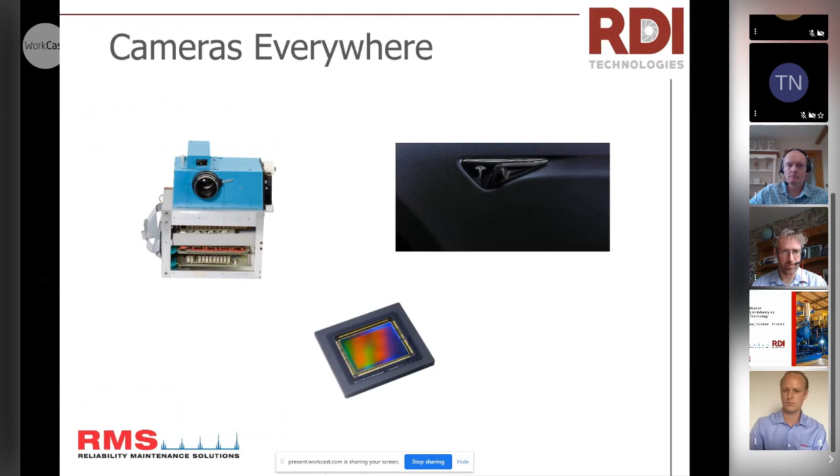You can see an image of a Tesla there with the camera, and cameras now actually help us drive cars. That application base is really growing.

We're using them again to drive cars. They're used in AI to distinguish objects, to tell the difference between a human and an animal. They even show me who's at my door.

A Ring doorbell, for example, alerts my cell phone to let me know that there's someone at the door, and controls traffic. They know when you run a red light, and then they send you bills. Cameras now automate billing processes. Every time I drive across the local bridge, I get a toll in the mail automatically from a camera seeing me drive across the bridge.

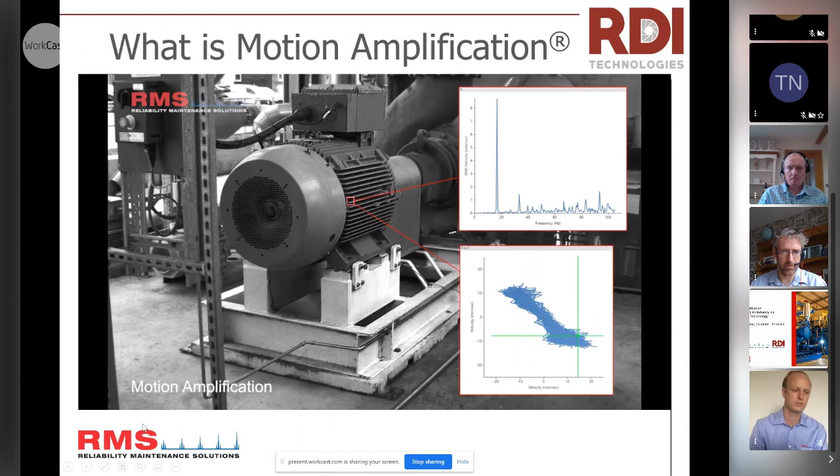What we're seeing here is motion amplification video, and I'm going to start this over so you can see at the beginning here. With your eye, you don't really see any movement, but motion amplification essentially turns every single pixel in the camera into a sensor. Now you've got millions of displacement sensors.

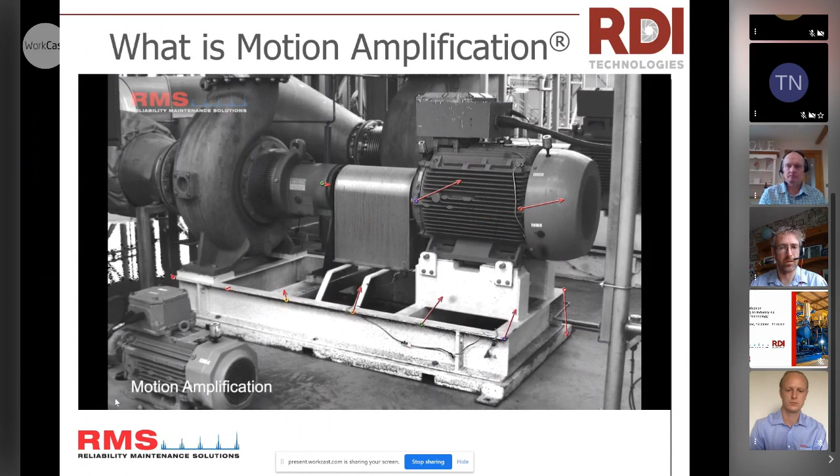Even a modest camera has 1 million pixels in it, even a small resolution camera. You can start to do some interesting things like plot charts and graphs and pull data out, and I'll do a short demo showing that.

Here you can't see any motion. Now you can turn on the amplification process, and you can actually see the motion in it. This allows the camera to be a machinery monitoring and vibration tool where we can actually visualize motion, and then do a lot more.

Track the motion, measure the orbits, show the plots, the paths, measure these things, do spectral analysis, and we'll show some of that in the case studies.

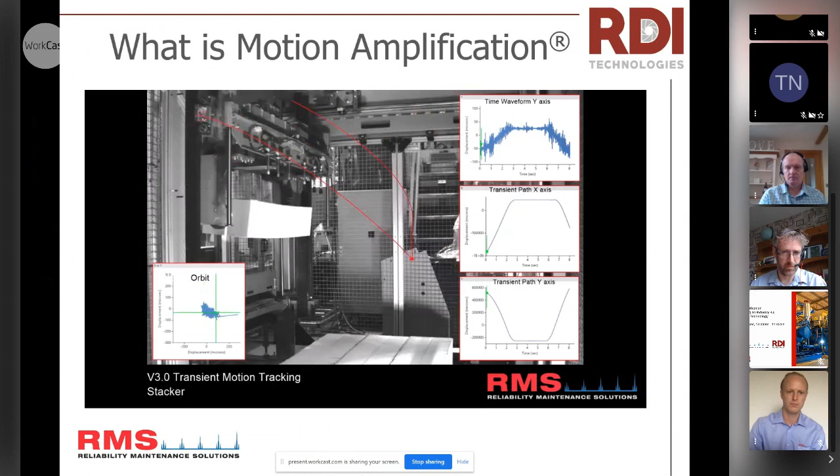So a little bit about the technology. You see this plot over here on the right, that's a spectrum. That spectrum tells you something about the object, right? Maybe it's the combination of the two plots.

Maybe it's the relative amplitudes, maybe it's the amount, the level each one of those peaks hits. But it takes some analysis to really understand what's going on there, where this video really shows when one side's going up, the other side's going down. So it makes it a great communication piece as well as an analysis piece.

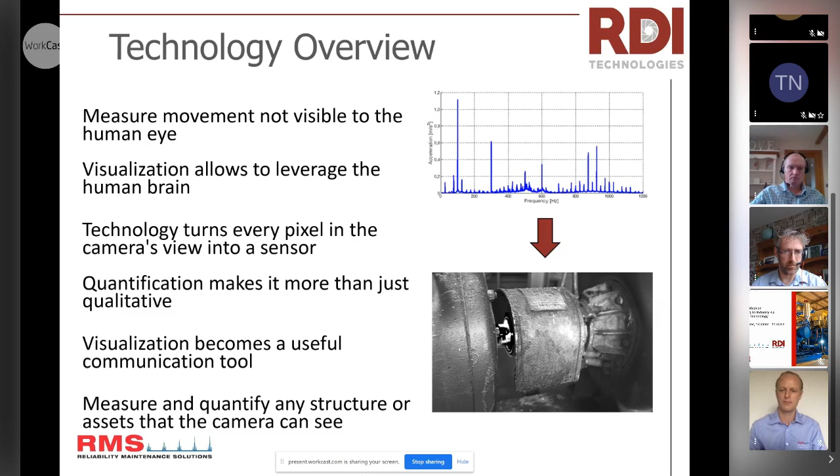Really what we're trying to do is leverage the fact that we've got millions of pixels, millions of sensors there, that we can all use in tandem and use the human brain to just look at it and quickly make an assessment right there on the spot, and then also communicate that issue to other people, even if they're a non-technical person.

As you scale up with your data collection process, it gets pretty cumbersome and pretty expensive to do that. But with motion amplification, you can think about adding 1 pixel or 2 pixels or a million pixels. It really makes no difference because it's all nicely packaged in a camera, and you can use that as your sensor and your data collection, so you can do full field vibration.

A little bit about the technical details of it. It's really measuring displacement, that's fundamentally what we're measuring here, and that makes it a really nice tool because there's not a lot of displacement tools that are common throughout data collection with machinery and vibration.

You can do it live, I'll do a demonstration here. You can amplify it, up to hundreds of times. And you can show individual or overall motions, both. That's really key because some faults manifest at individual frequencies.

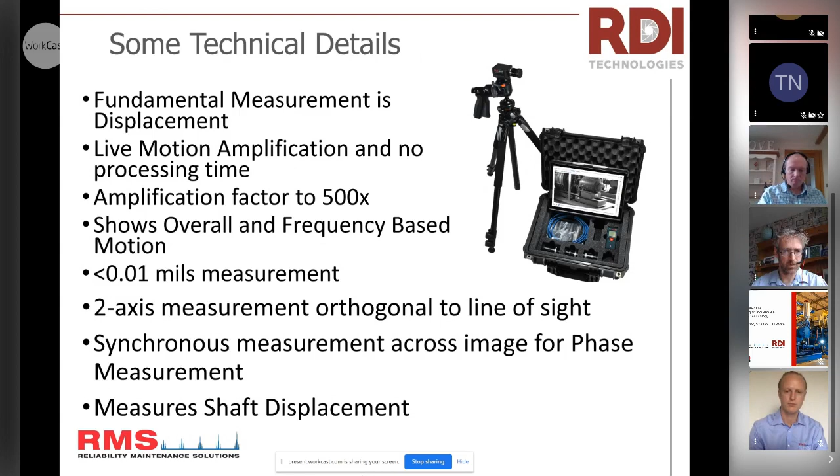At 0.01 mils, you can essentially see anything that is of interest to you. So let me go into a demo here and show you some of these benefits. We'll talk about why it's a complementary tool and how it's improved safety.

It also measures this large field of view. That's this full field vibration technique—being able to see the entire field of view and pick out different parts is really important.

But I want to really emphasize this communication piece. I like to think of it as one part analysis and equal part communication, because if you collect data—the best data in the world—and it really tells the story of what's wrong with the machine, but you can't get buy-in from that data to get movement on repairing the machinery, it's as if that data didn't exist at all, because you haven't been able to take action. That's why actionable information is so important—you can actually do something with it.

So here's a couple ways to deliver it. You've got the normal troubleshooting kit, which is the thing you take out and do the analysis on the spot—spend an hour at the machine, 30 minutes at the machine. You can use a high-speed camera, which is the Iris MX. But also, at the bottom, we have the Iris CM, which stands for continuous monitoring. This is a fully networkable, scalable solution.

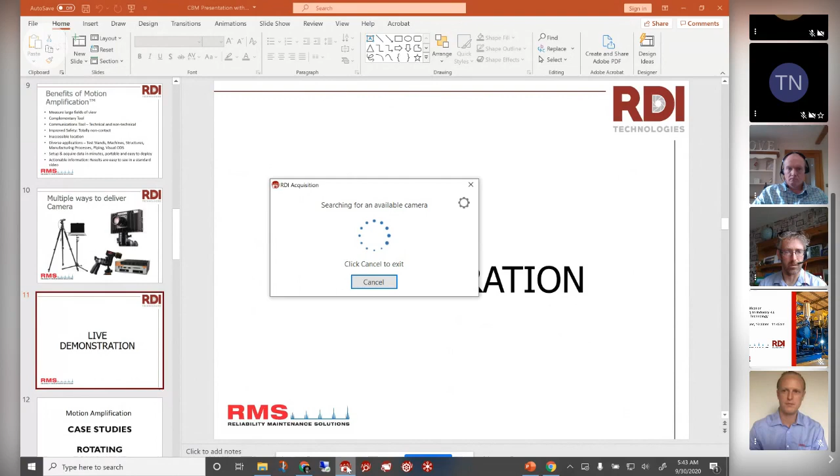Okay, so let me get straight to the demonstration here. I'm going to turn on a camera. I've got a rotor kit—a little machine vibration trainer that I've set up. I'm going to turn it on. I've already focused this—you would normally focus it, set your exposure, the brightness—we've done that for the sake of time, but it takes 5-10 minutes to set up.

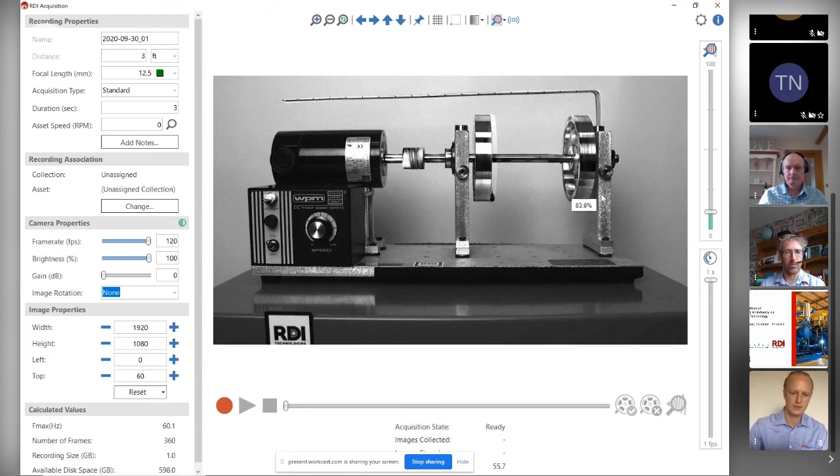One of the things I want to show you is this live amplification. If I just hit this button, I can immediately show live amplification. All the videos you see here—this is the process it takes to get them. There's no magic going on behind the scenes; it really is this quick. So you can actually show and do scanning right there in the field with this live amplification.

If I wanted to know how much that's moving, live on the spot, I can draw a measurement here and actually get a time waveform and a frequency spectrum right there. That tells me that's moving 1 mil in one direction and 5 mils, or 10 mils peak to peak, in another direction.

Let me take a data collection here, for about 3 seconds, and then go into the amplification process. I'll turn that rotor kit off so it's not so loud. And then here we've got the amplification software—you can see I can play it back and it's instant. There's no processing time for this.

Again, if I wanted to make a measurement, you just draw a box here. You can make as many of those as you want. I'm going to move that box up here to the tip of that cantilever beam and make a measurement there.

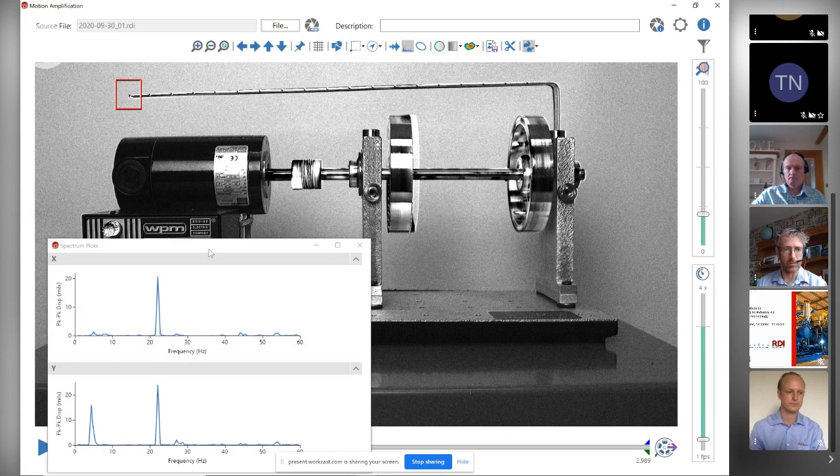I mentioned that you can filter as well. You'll notice I've got a couple frequencies here. If I go up to the filter screen and want to isolate one of those, I can show the Y and show those together—I'm going to add a filter. It's really simple UI, just to show what frequencies are present, because certain faults manifest at certain frequencies. If I isolate one, green means it's going to stay, and I hit apply—it goes through the process of filtering the data to only show that one frequency. That's important because certain faults manifest at one frequency.

So another thing I wanted to demonstrate is the speed at which you can do this. The key part here is the fact that this is field usable.

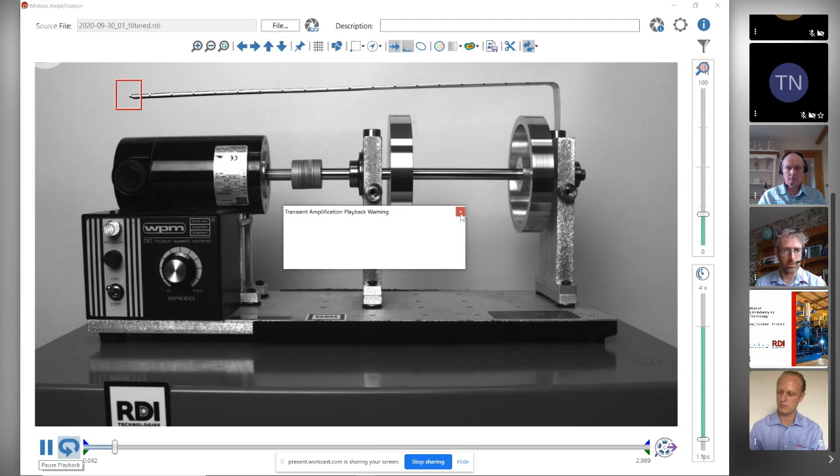All this can be done in the field. You make an analysis and look at it right there on the spot, and you can actually see what's going on with the asset. If you remember, that motor was moving quite a bit, but if I play this back, you can see the only thing moving there is the beam.

We filtered for the beam frequency. If this was a fault, it would manifest and show you exactly what the fault is. Let me go back for the sake of demonstration and show the original where everything was moving. Now we've isolated that beam frequency.

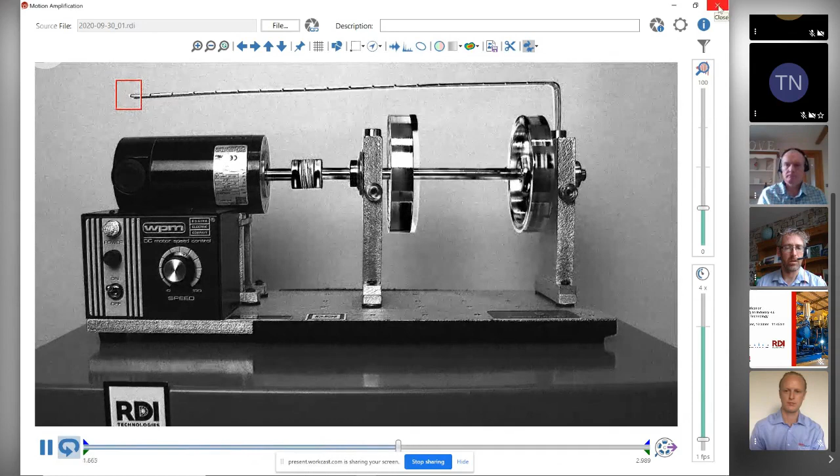I just wanted to show a short demo to set Stuart up here. I'm going to hand it over to Stuart. I wanted to show, in preparation for the case studies he's going to present, how easy and quick it is to collect these videos that he's going to show.

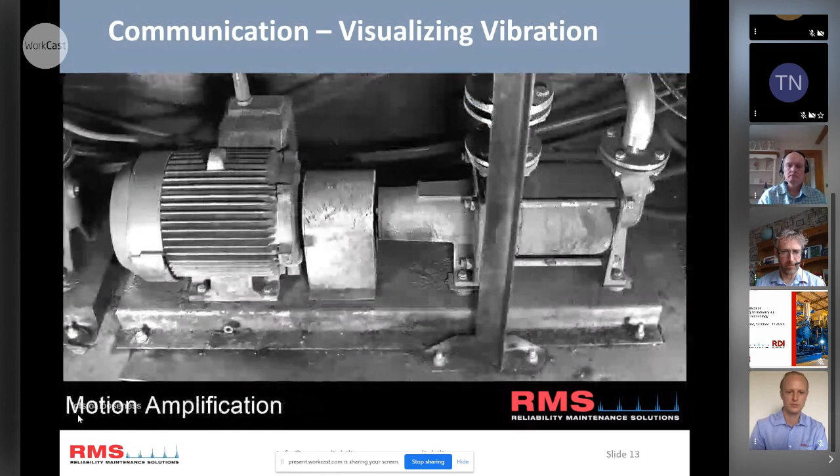This next set, they had lots of reliability problems with these pumps, and we can see the motion there, really bad—base problems again, and I think you can also see some misalignment. The pump and motor are moving out of phase. This needs a total overhaul.

Again, the beauty with the camera is you can look at the whole system. We can see the pipe trying to rip the pump off the bed, and we can do a measurement there as well. As a communication tool, it's unbelievable. I've been to sites where faults that weren't repaired before are suddenly being repaired because people understand the problem. Next slide, please, Jeff.

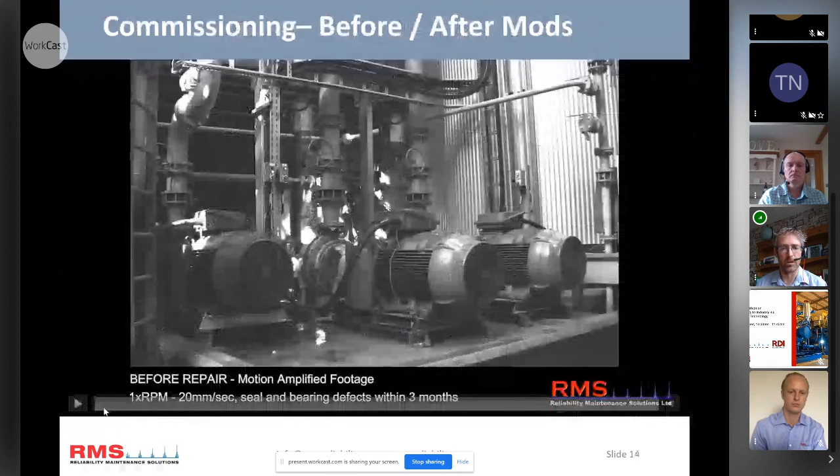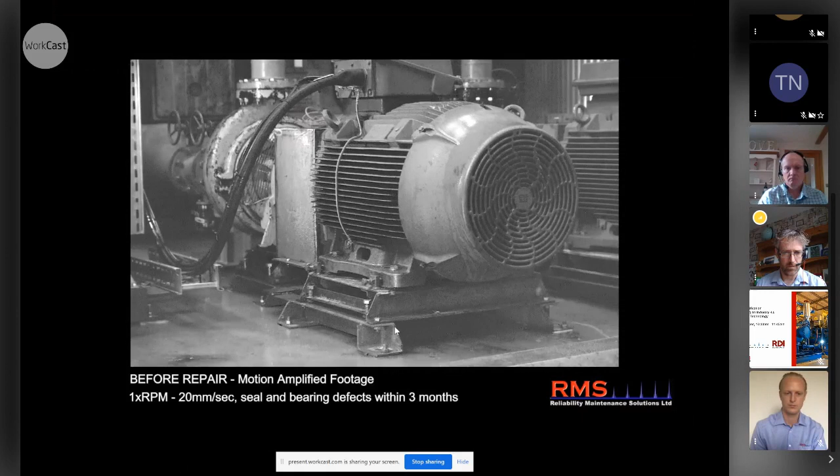Here we've got, again, a base problem. These were newly installed pumps with a lot of vibration on them—20 millimeters per second, bearing faults, seal failures. The CBM team wanted us to have a look with the camera, and the camera just exposes all the weakness with the base, every little looseness. Eventually these bases got replaced, and now we've gone from 20 millimeters per second to 1.2, a 94% reduction.

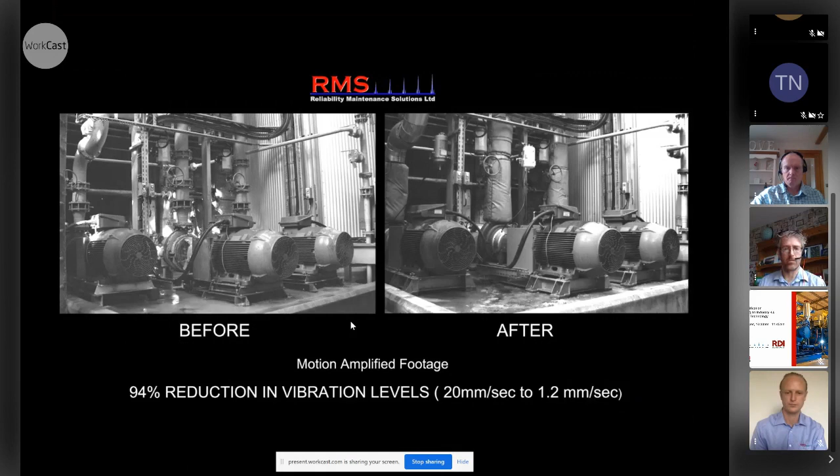What's key in these videos, you'll notice when the vibration levels are low, when we amplify the video, you don't actually see any motion. In other words, you can't make a good machine look bad. Next slide, please, Jeff.

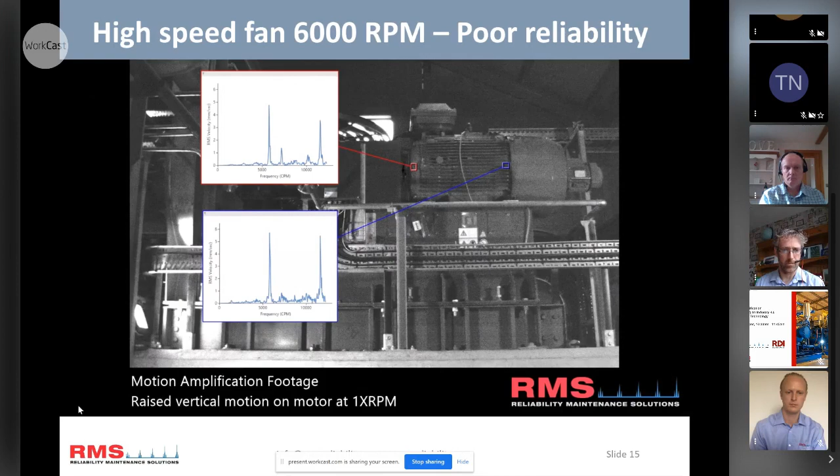This machine is a higher frequency machine—a fan doing 6,000 RPM—and they were getting raised vibration levels on the motor at the rear. When we looked with the camera, we could visualize the whole asset, and we could see vertically the motor had motion. Looking closer, we found it was the way the base had been mounted to the concrete plinth.

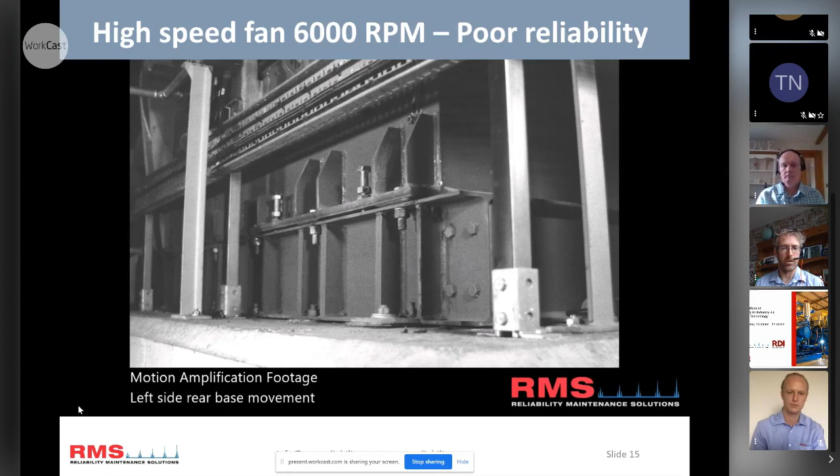There were packings used, which wasn't good, and you can actually see the motion there. It's not excessive, but it's enough—doing about 10 millimeters per second. We could even see a loose bolt there, and you can see the flexing of this structure. But you've got to imagine this thing is doing 6,000 RPM, so this is occurring really often when we're looking at the data.

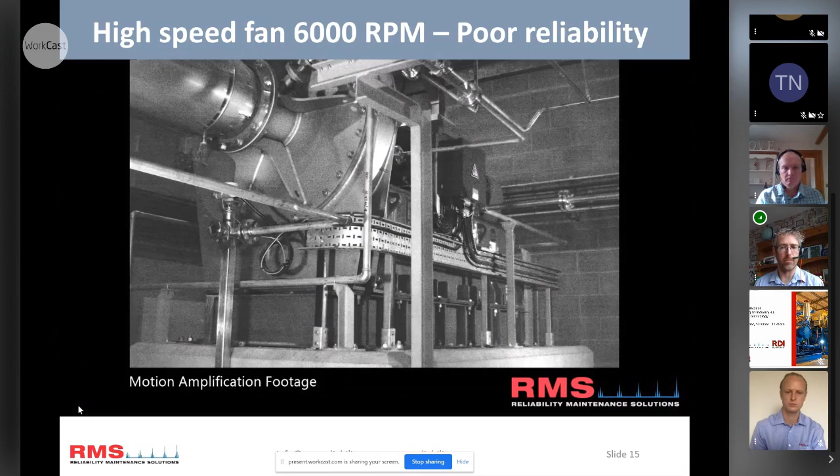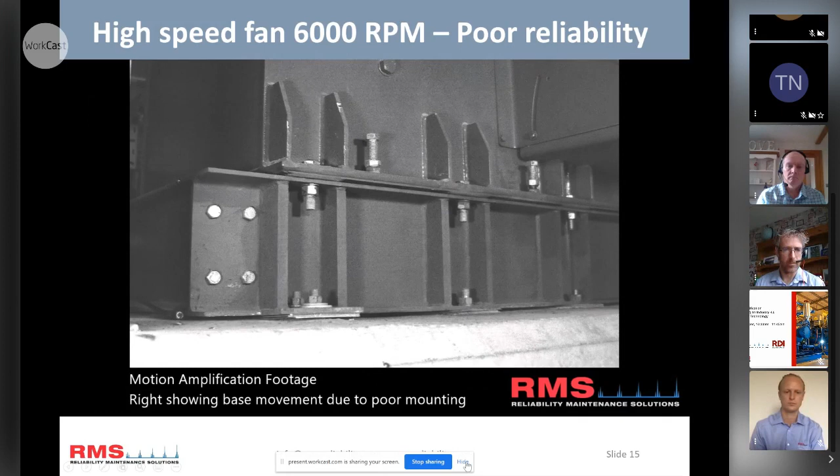We do lots of different angles when we get on site to document the machine—we don't just take one shot, we'll look at where we see the motion. You can see on this right-hand side, this next shot really shows the problem with the packings—the motion there, it's resting, it's flexing, and that's the problem of this machine. They're currently repairing this, and I'll get some aftershots. Next slide, please.

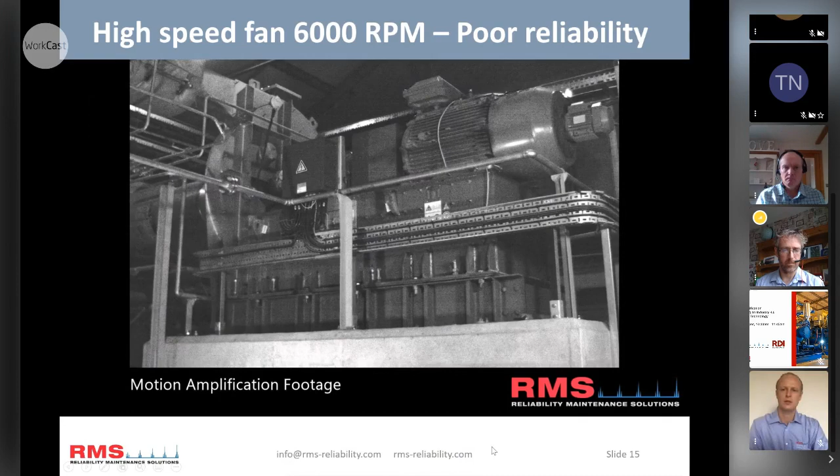So this was an interesting pump problem we had. Again, it had repeat failures, bearing and seal failures. And it turned out...

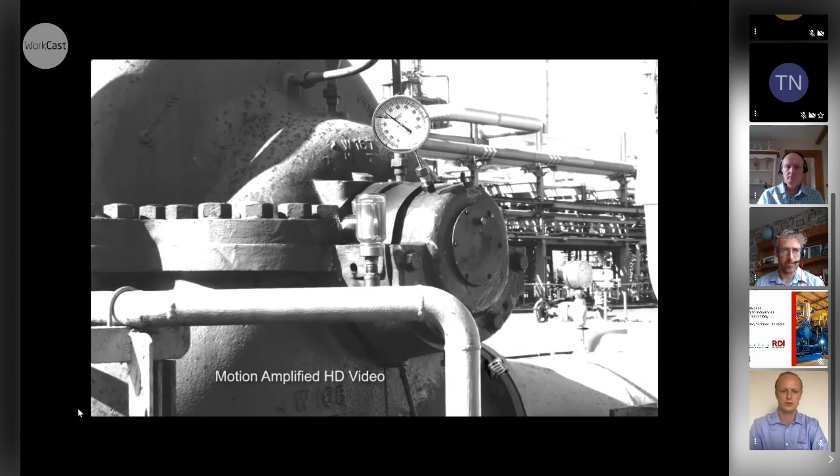If we watch the video here, this is standard footage, and then we see the motion amplified. Can you see it's sort of flexing the bearing? Initially we thought it was loose, but when you look, everything's tight. So these are actual forces inside. There was definitely something not right.

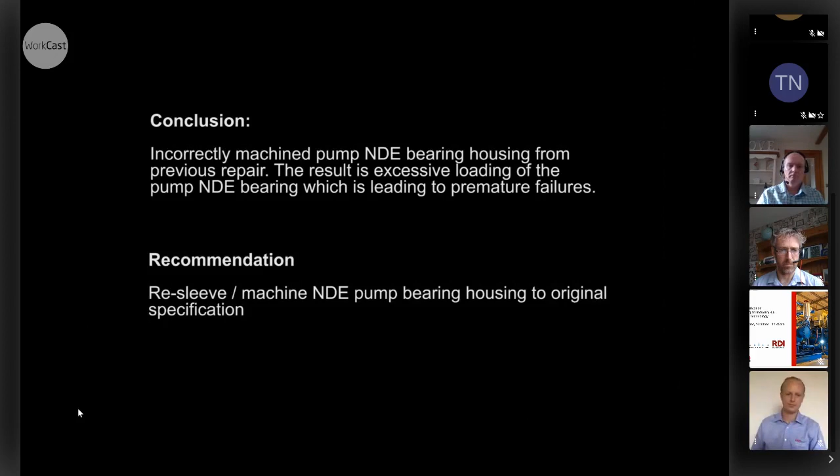After we saw that, we said, what's the history of this machine? And it turned out the housing had been machined incorrectly two years previous with a failure, and that was causing the problem. Next slide, please.

So this is one I actually got last week, the follow-up. Very often pumps are put on VSD drives, variable speed, in the modern way of doing it. But unfortunately, if you hit a resonance, you're going to have problems.

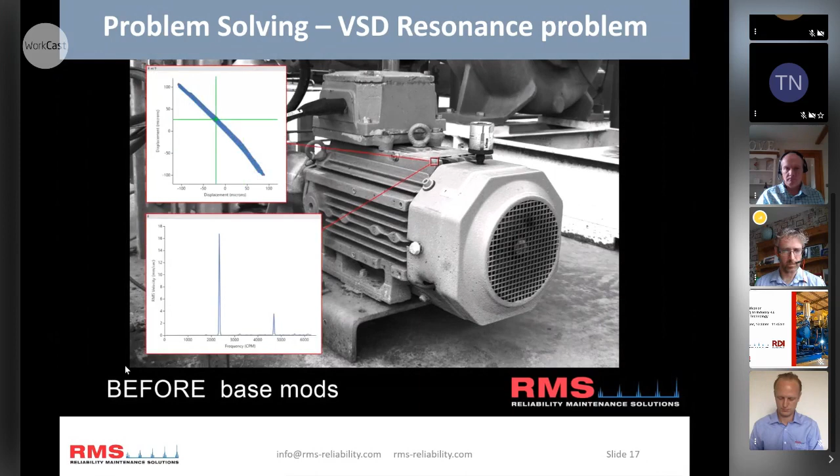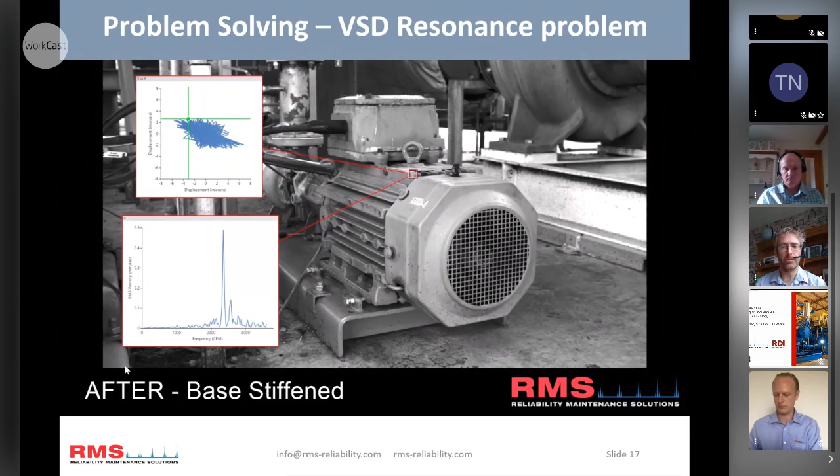So if we play this video, I'll show you the before and after. So this is the before - it's a resonant condition, the base is flexing, lots of vibration up to nearly 20 millimeters per second. Stiffen the base, and you can see there's a massive reduction, from I think it was 18 down to 0.5. Big difference before and after, and it's so visual with the technology.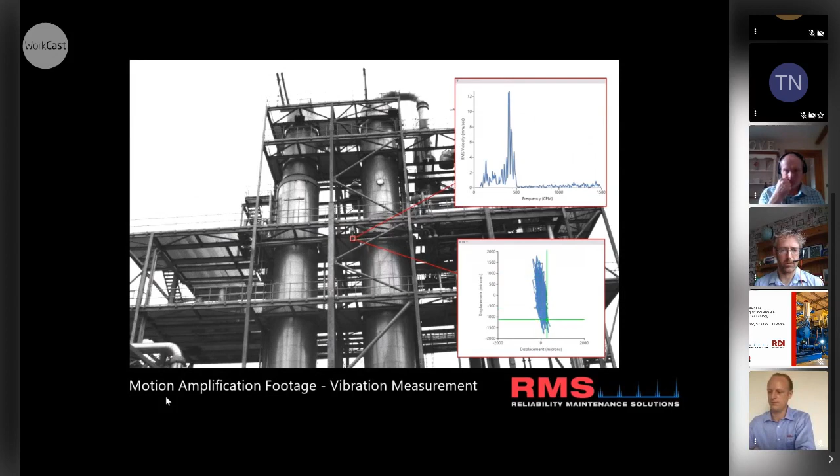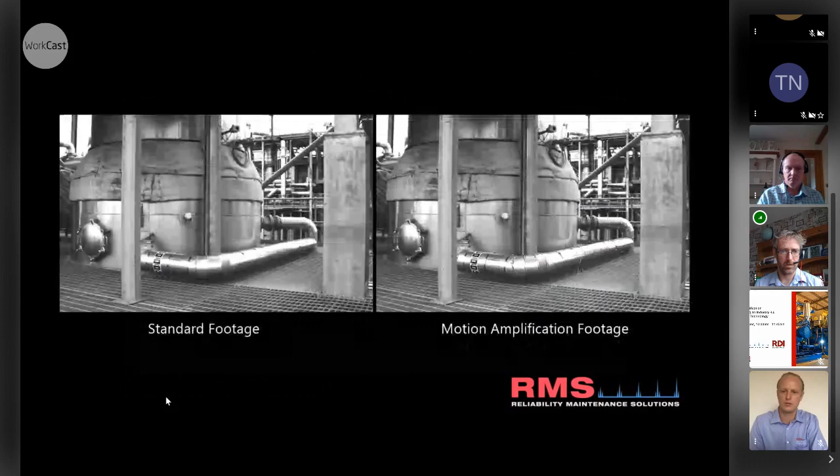We do a quick non-contact measurement. We can see it's been excited by the flow, and its natural frequency has been excited. So what we did, we got closer to the asset, got up there, got some closer shots. We could really see what was happening, and this is putting a lot of strain on the connections here, on the flanges to the column.

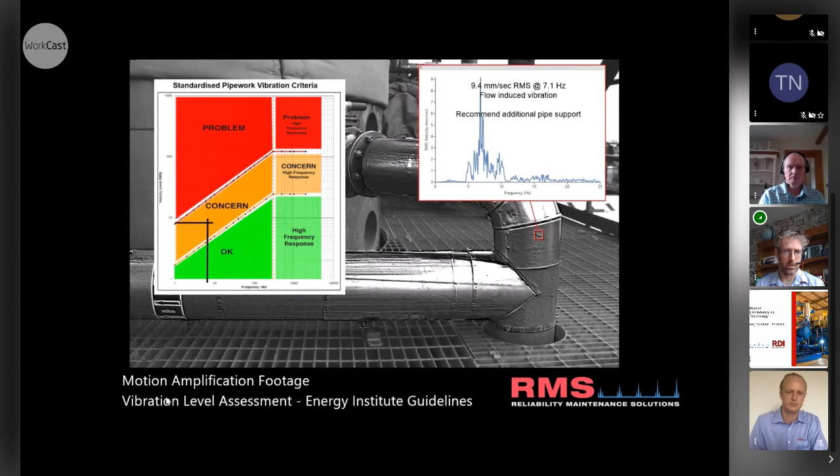So what we do, we can do a non-contact measurement and actually apply some Energy Institute guidelines for pipework vibration that can tell us if it's an actual problem we need to look at. And we could see, we look at the frequency and the amplitude, and we could see this was definitely in the concern bracket. So we would recommend here some more pipe support. Okay, next slide, please.

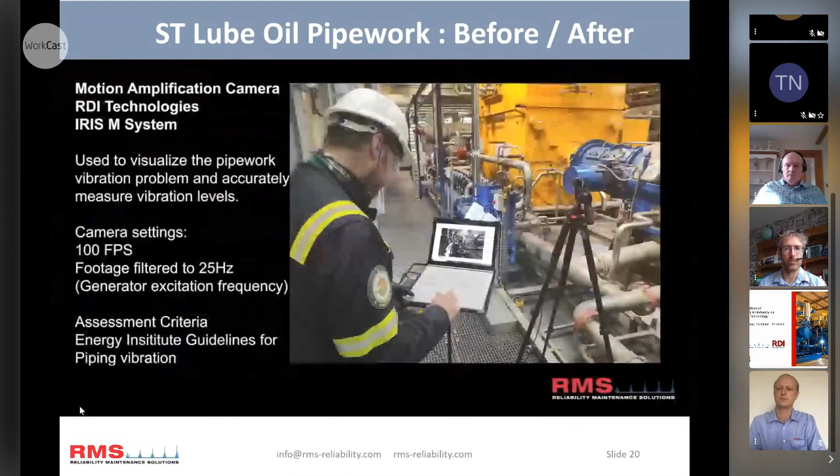So this is a steam turbine, brand new, and they had lots of lube oil pipework vibration. They could tell it wasn't great. This is a brand new machine, and we were asked to look with the camera at what we can see. So this is what you see with your eye, and then the camera, lots of motion going on.

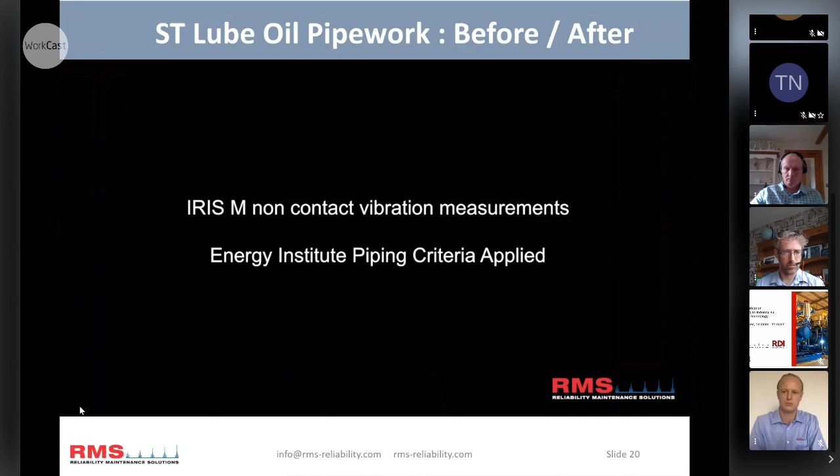If you remember when I said we're seeing it with the camera, it's generally usually out of spec. So we're taking lots of different angles - there's the oil cooler, HP and the LP. They were all showing quite high vibration levels on this pipework, and it was at a frequency of the generator, up to 50 millimeters per second on some of this pipework. So we applied the standards, and we can see a lot of it was out of spec.

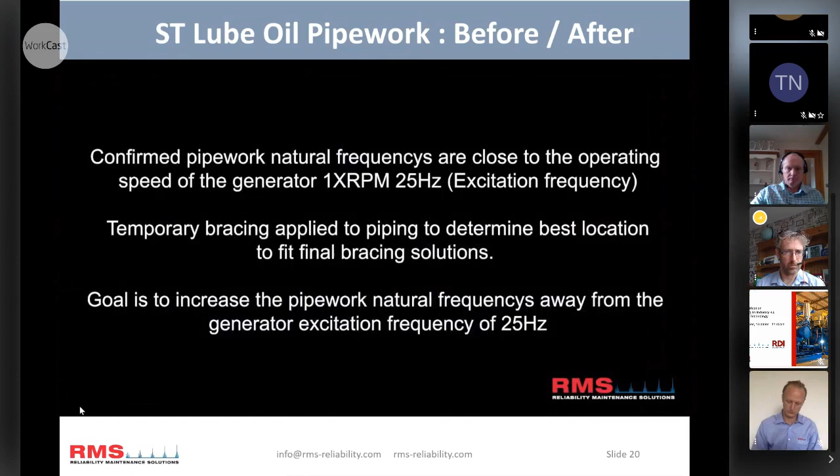So what we then did, the turbine was off, and we did some bump tests just to confirm the natural frequency of the pipework, which was very close to the generator at 25 hertz.

So then the next thing we did, and this was really key, we were on site and wanted to do some temporary bracing. So I went into live mode with the camera. Keith's here and he's actually tightening up a brace. So I'm watching with the camera what's happening to all the pipework, and he absolutely killed it at that point. For me, it was like having another pair of eyes on site.

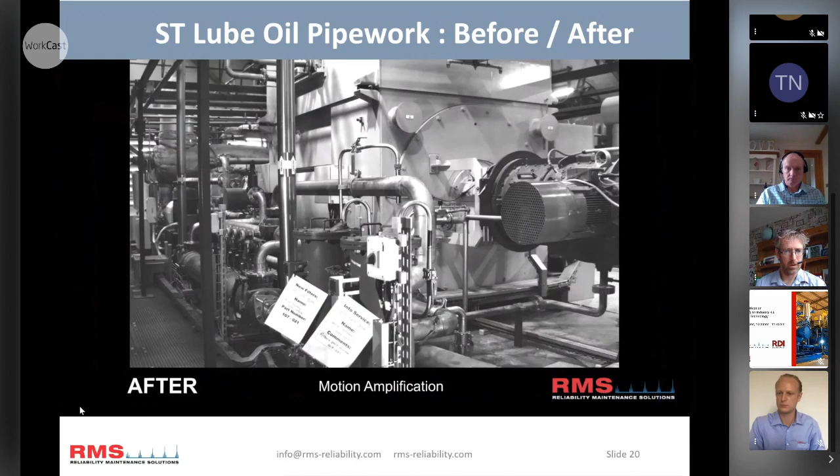So we added some braces in key locations, and this was the before shot. And then we'll show the after, and we reduced the levels massively - I think we've got them down to like 1 millimeter per second, 2 maximum maybe. This is before and this is after. But I can't stress enough how it was like having a second pair of eyes.

It's just unreal when you've got this technology and you're trying to do a job like this. You're really worried at times - if I brace it here, what's going to happen elsewhere? Well, with this camera, we can see everywhere, so it's not a problem.

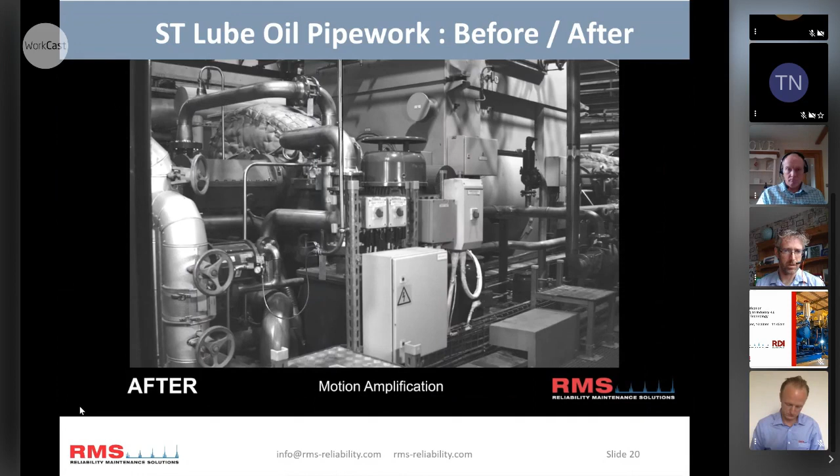So again, after we'd done these scans, we did some measurements just to compare to before, and you can see on the graph we're down at 0.7 of a millimeter per second now. The problem with this pipework, if you leave it with high vibrations, there's a real chance you can fatigue fail pipework, and as we know in the oil and gas petrochemical industry, that can have serious consequences for pipe failures. So the technology worked really well in this example. Next slide, please.

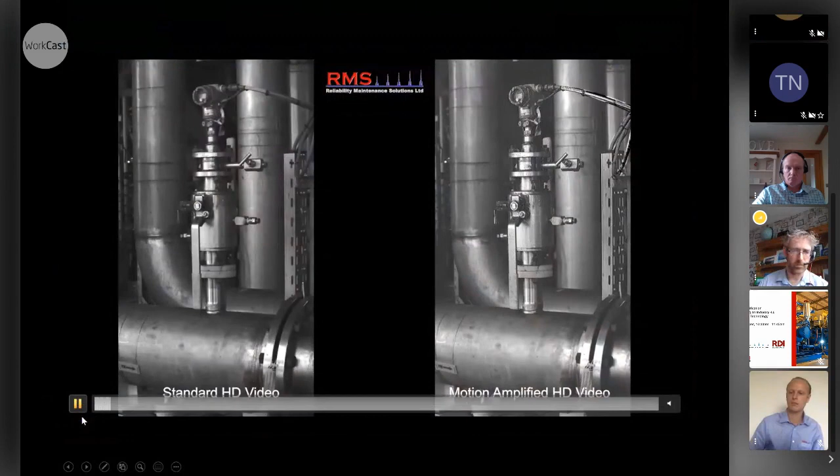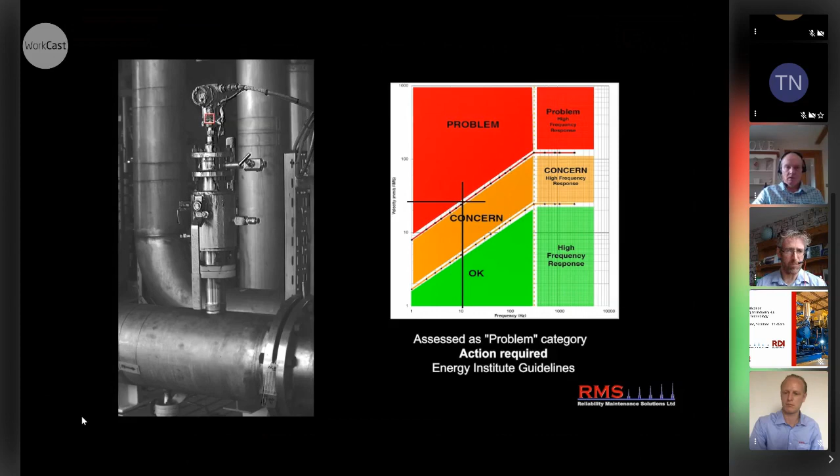Okay, if we play that one - this was an interesting one. A lot of sites have used the camera for scanning large areas of plant, and this was on a survey doing lots of machine trains, looking for problems. You can actually see on this one where the weld's going to go, it's that visual. So again, it's been excited, it's well out of spec. On this one, we recommended a brace in the direction of the motion, and we can see here the before and after - 94% improvement. So there's no issue now. This small bore branch was going to fail. So yeah, a nice job, that one. Next slide, please.

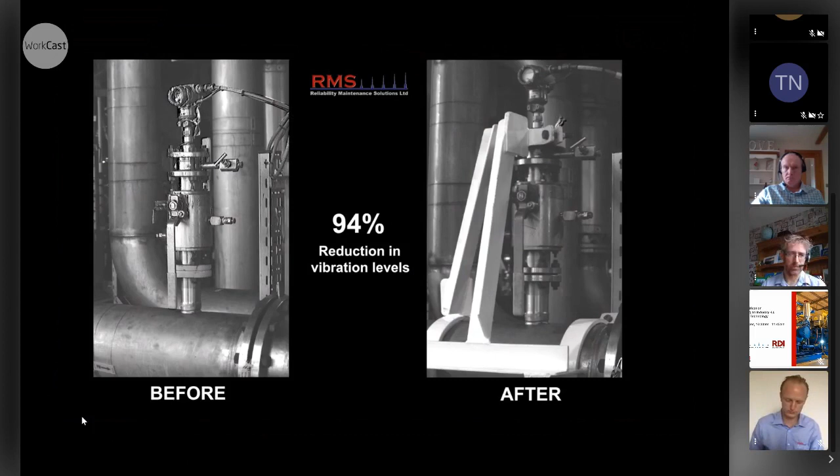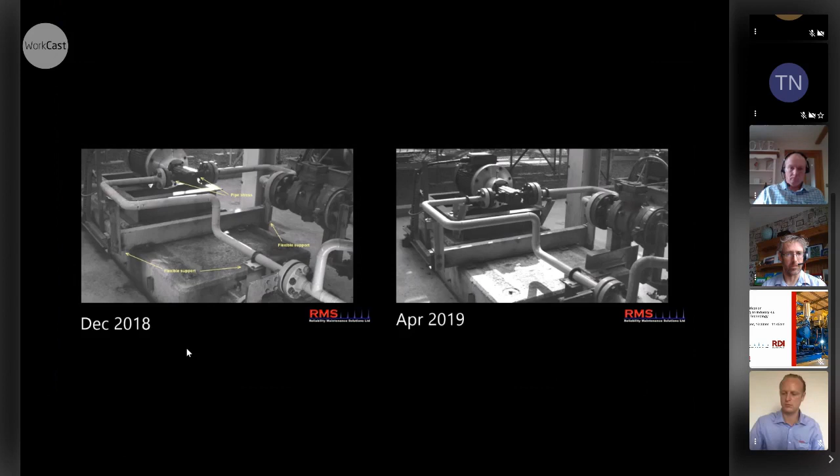Yeah, play this one - so this is an interesting one. This one's a lot higher frequency. So this was a glycol pump, before and after. On the left's the before, this is the after shot. It was actually the pulsation frequency of the pump here. So on the left, you can see quite a lot of motion on the pipework. They were getting problems with the pump failing as well, and this vibration is at 250 hertz. So we used the MX camera, we could visualize the pulsation frequencies, no problem.

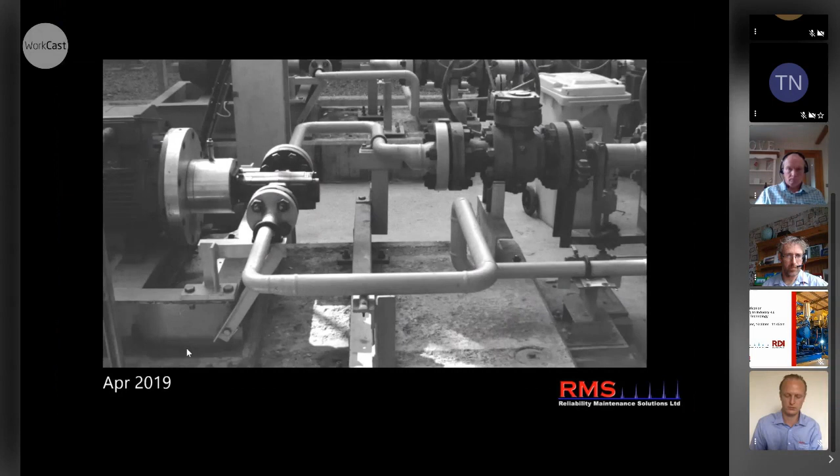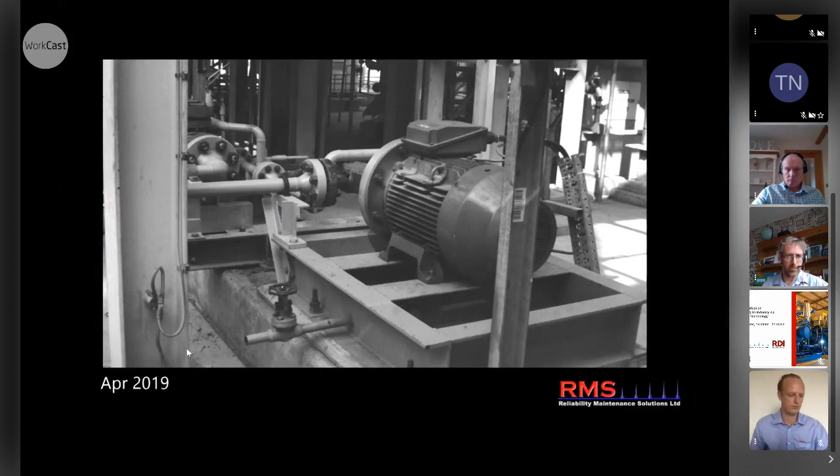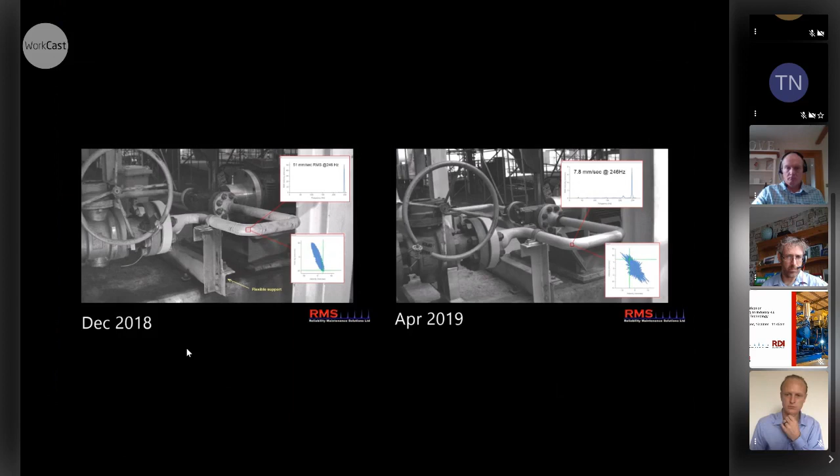But we can see a dramatic drop in vibration with the extra clamps we fixed on. What was really interesting with this machine, the main problem was actually the pump failing - it was only lasting 3 months. When we looked at the motion amplification videos, you'll see a shot coming up - it was quite clear it was the pipework that was flexing the actual pump body, and these are tight tolerance. So the left shot's before, the right's after. We dramatically reduced the flexing on that pump, which in turn - I don't think they've had a failure since we've done these mods now, which proves that it was the pipework causing the pump problems.

Okay, next slide, please. So what I'm going to talk about now is just some structure ones. We've had a few questions actually saying how far away can we be? Well, if you've got a structure and there's motion there, we can visualize it. So Jeff, if you'd like to play the next slide, please.

So the first one's quite a large chemical plant, lots of different sections of plant, and there's the standard footage, and then there's the amplified. You can see on the left-hand side, there's quite a large piece of the plant that's vibrating. This is very low frequency - the camera can handle right down to zero. You can see we can get a measurement off there. A lot of structures vibrate quite low - this was at 1.46 hertz.

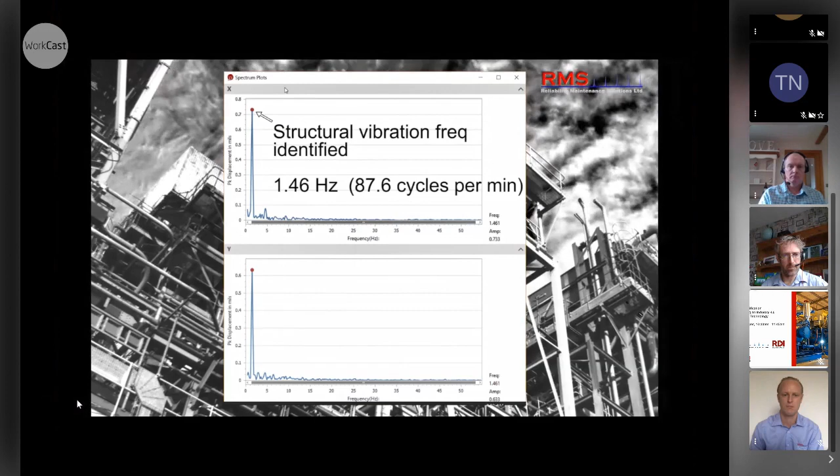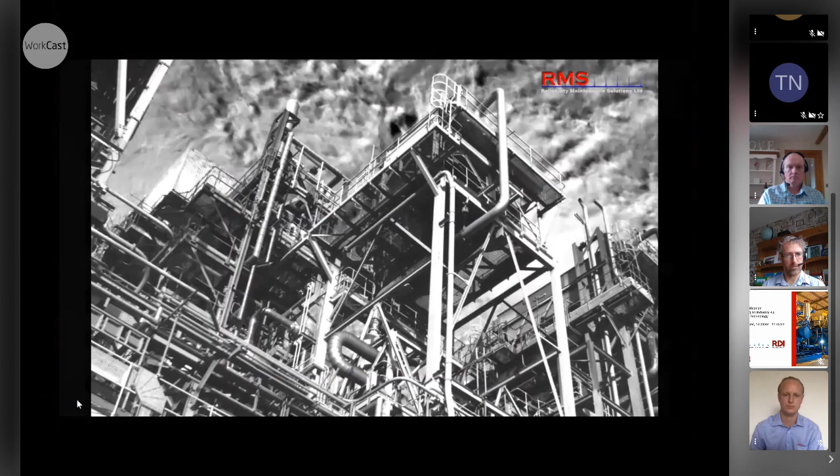So on the videos, we actually speed it up to see the motion. The result of this, it was being excited by an agitator nearby. When we turned the agitator off, the whole structure stopped, so we knew it was that. The fix was putting some bracing around the bottom of the structure itself, which cured it quite well. I need a follow-up on that, but it worked well.

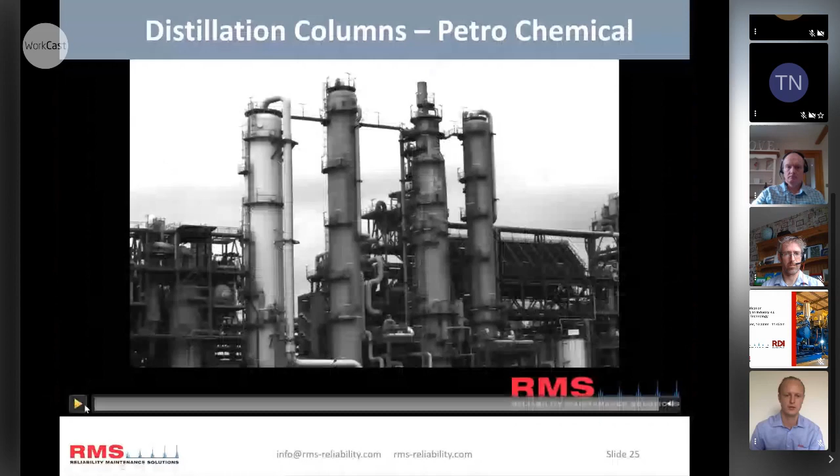Next slide, please. Right, just to show you the scale of this camera, these columns are on a petrochemical plant and they're around 200 meters away.

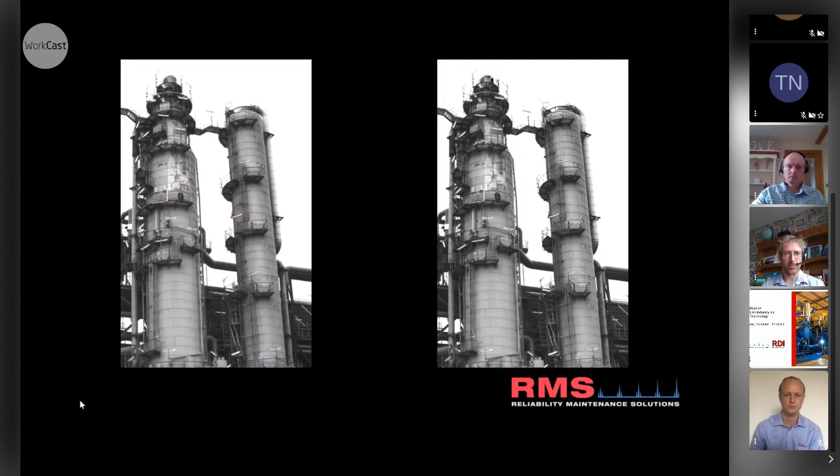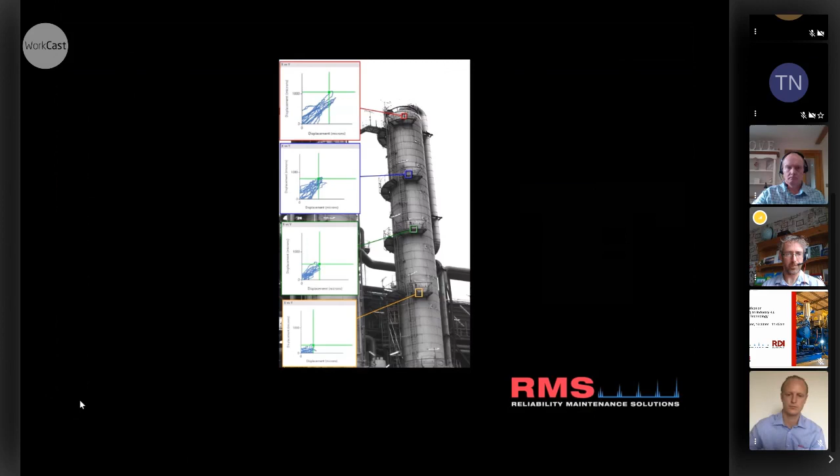And you can see the right-hand column, it's quite scary actually, quite a lot of motion. The guys on site knew it moved, but we were quite shocked when you can actually see it. And we can measure that - as long as we know the distance to the point, we can actually get accurate measurements. What was the cause of this - it didn't have a dampening device. A lot of these towers have water tanks there that sort of stabilize the column. This one didn't, the others had. So I think they're looking at maybe implementing that on this site.

Okay, next slide, please.

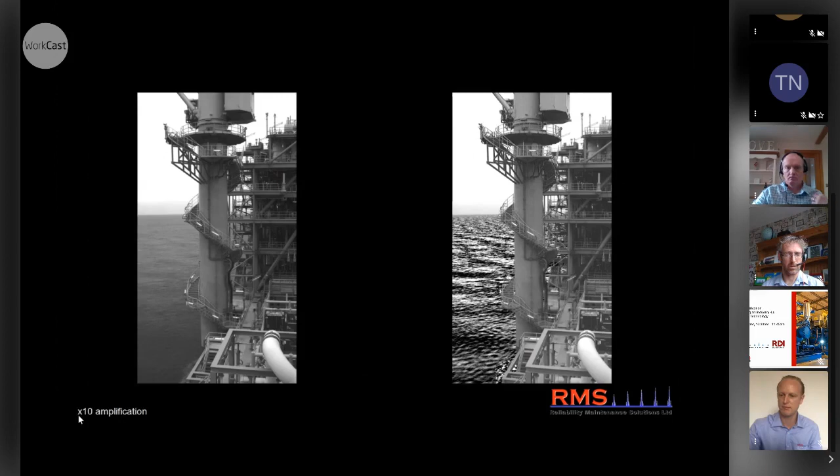So we've also used the camera a lot offshore, and we can see here a crane that had a severe vibration problem. This has now just recently been fixed with a dampening device down the center. So even though you might get motion of the boat, the camera can deal with that. We can filter to the frequency of interest or use stabilization in the software. So yeah, that's worked really great.

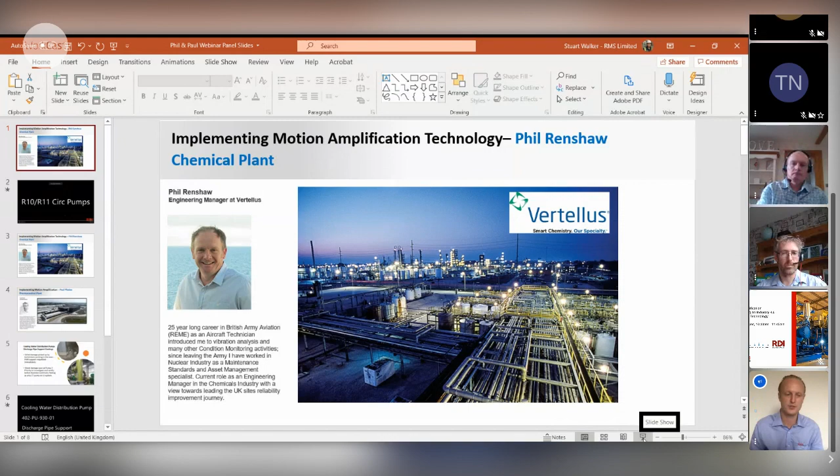Yeah, thanks, Stu, and thanks, Jeff. That was really good, really informative, and I think we answered some of the questions there just by going through those slides. It was really good. Thank you very much. Funny looking at those pumps as well.

I don't know if any of you guys have pumps that can dance like that on your sites, but they were quite impressive videos. So we're going to have a chat firstly with Phil, Phil Renshaw. His bio's on there, so I'm not going to labour that. We'll have a little chat with Phil. What can you tell us about your background a little bit first, Phil, your engineering background?

So thanks, and hello to everybody. I started off as an aircraft technician in the British Army a long time ago now, actually. So I've been around helicopters for all of my military career. Obviously we were quite engaged with balance and rotor vibrations and things like that, because helicopters tend to vibrate. So that kind of led me naturally into what this motion amplification technology can show.

And since I've left the military and worked in nuclear and now in the chemical industry, what I've moved towards is trying to improve maintenance and reliability in those plants that I've worked in. So when I got the opportunity to get RMS guys out to plant to show how this thing works, it was a real game changer for me, having spent many years with stroboscopes and flag tracking and things like that, and rotor tuner technologies. To actually visualize that quickly was amazing. So a real game changer.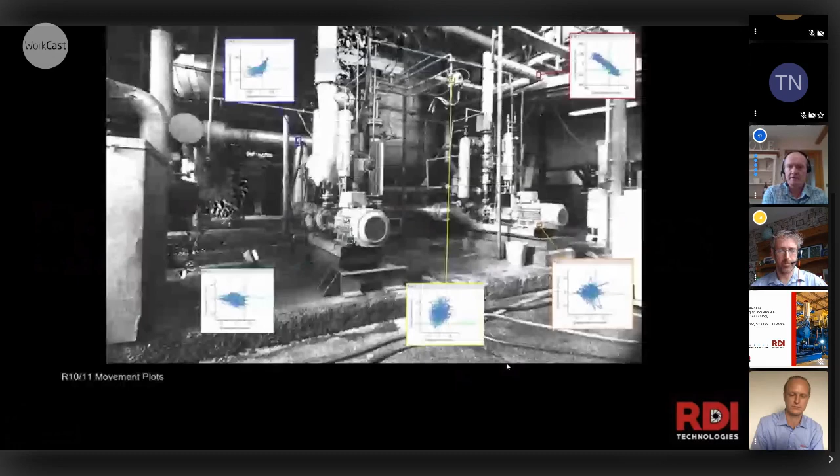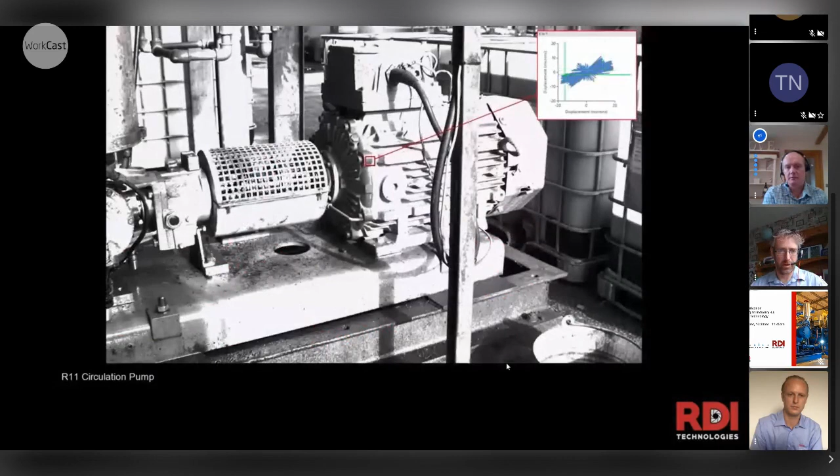We had a problem with these circulation pumps on two of our reactors, R10 and 11. This is before we did any work. What you can see is a lot of pipework movement, the base is actually flexing underneath the motor and moving. It was basically just thrown onto some steel and that's it, and you can see the frame moving and everything else as well. There were issues with alignment, the whole things were going all over the place, and we were changing couplings every 4 weeks on R10.

So it was costing us an amount of money. Once we highlighted that, we put in a request for some funds, which we got, and this is what it looks like now.

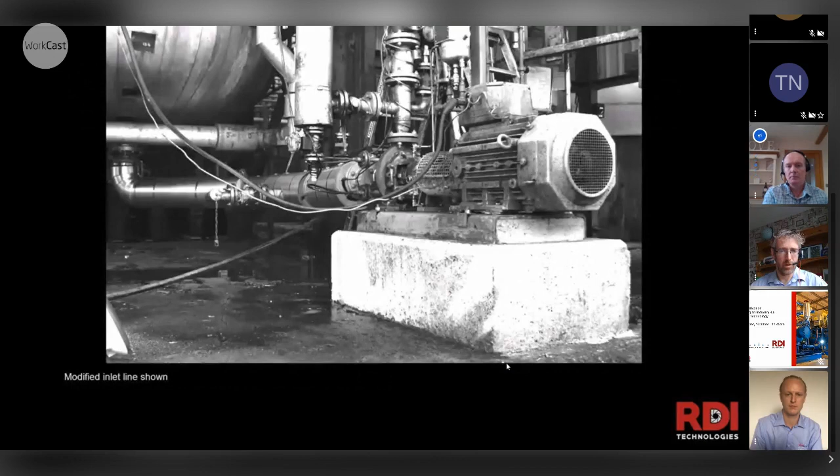We've got new bases down, we've mounted the pumps properly, we've aligned everything, we've strengthened pipework supports, and aligned the pipework properly. The only thing that's moving now is some small bore pipework, which we're also fixing on the sample port.

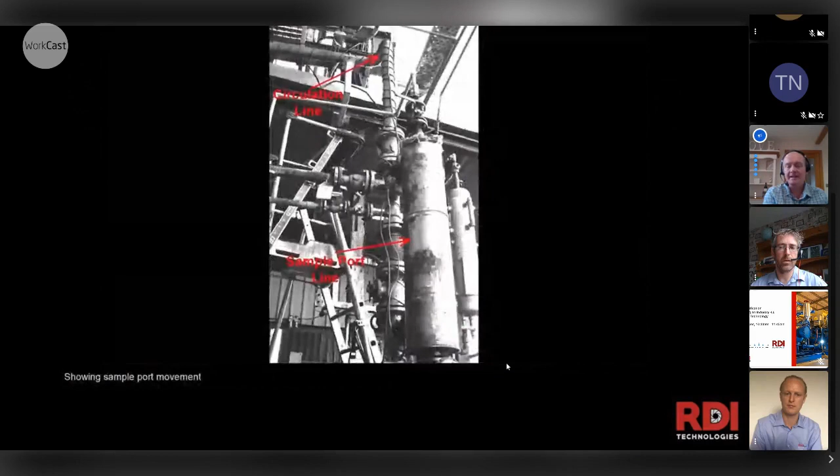But the level of vibration and the level of failure that we've reduced is massively significant. Going from changing that coupling on that pump and motor unit every 4 weeks to running it for 6-8 months without doing anything to it, other than standard routine maintenance, is massively significant in terms of your engineering hours and operator hours.

4 hours to change a coupling, and we're saving that every 4 weeks, and that's 4 hours we can use elsewhere. So, you know, cool.

And then being able to demonstrate that back to the company and say, okay, you gave me this money to do this work, and here's the results, and this is how much time we've saved. So that's really important.

That after shots that you've got there, being able to look at it afterwards is a real killer, isn't it? To show that actually, yes, we do these works, we do it properly, and this is the evidence to show that it has improved it.

Yeah, as Stu said in his case studies, if there's nothing to amplify, it can't amplify it. So if there is no movement, if the thing's installed correctly and there's no problems with it, you can't just make it move. There's got to be some movement there for it to be amplified.

So it's been a huge improvement on our site. And it's not just the engineering team — for me, reliability is a team sport. Everybody's involved in it. We've had operators out, we've had the plant managers out, we've shown them the issues, and they've worked with us to help us get the work done. So it's a really great technology to get things started as well.

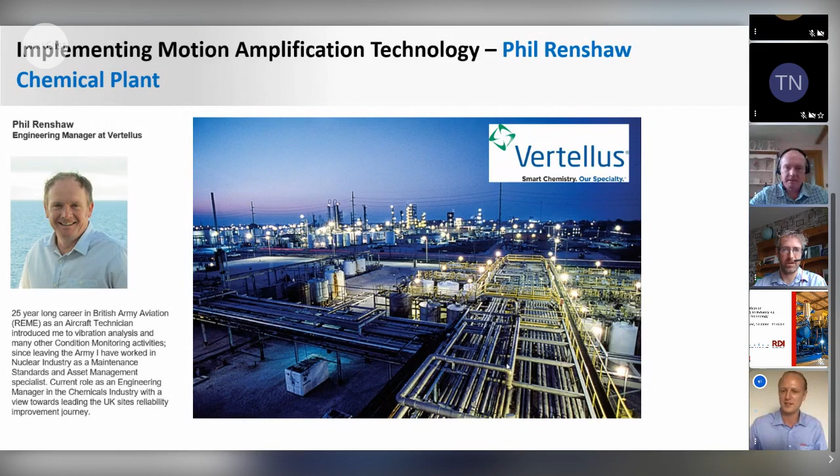Sure, yep, no problem. So I'm a mechanical engineer. I started out as a machinery designer for quite a few years, designing machines from scratch, and then gradually moved into condition monitoring with vibration analysis. Spent a bit of time in Australia before I came back to Ireland about 5 years ago and moved into biologics, which is pharmaceutical, but it's where we're actually growing cells for immunotherapies for cancer patients.

So at my previous plant, I actually had Stuart come over to demonstrate the MA camera, because it had just come out, I think about a year beforehand, and it was actually an easy sell because he caught a pump where it was just a simple loose bolt, and so the video came up. I showed it to my manager, and he'd never seen it before, never seen the before and after, and he just stood there shaking his head. His question to me was, 'How quickly can you get this?' So that was the beginning of it, and within a few weeks we had the MA camera on site.

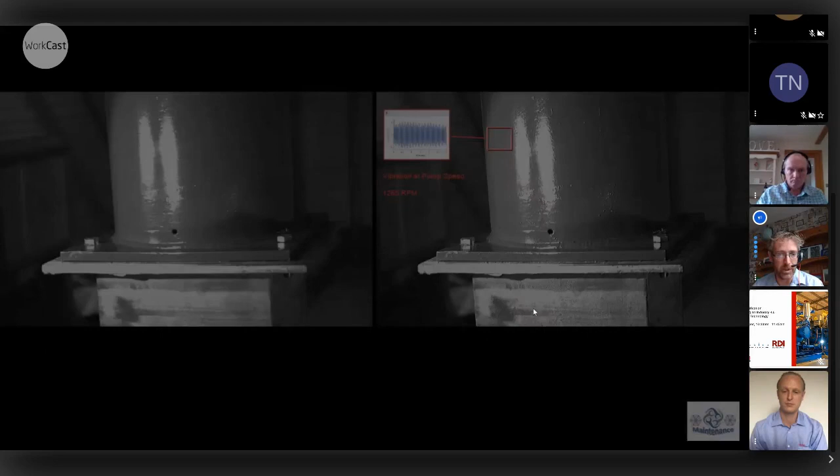So this is a good example of being on site with the camera and having the training to actually do something about it. I would have got the email about 9 a.m., and by 9:30 I would have been over there with the camera, and by about 12 I would have had the videos made and emailed back to the people to show where the actual issue was. Then by 3 o'clock I would have had a drawing done of where I thought the best support would be, and then you're done and dusted within a day.

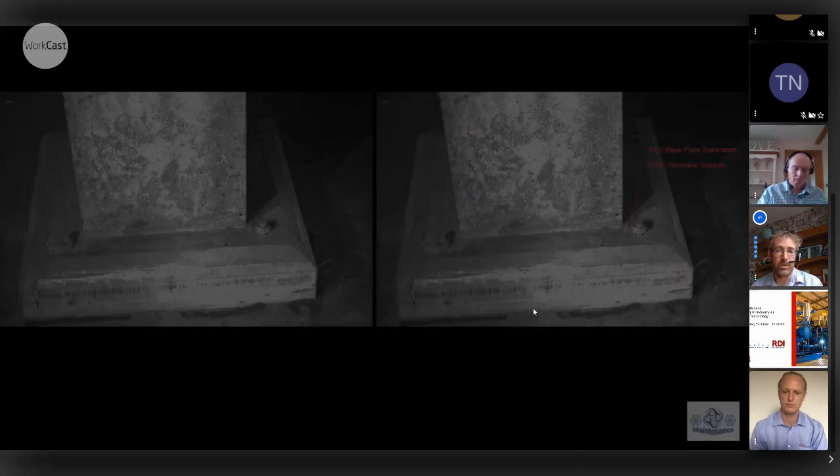Because to me, this would be a small issue. It's not a huge project, and you can't devote that much time to it. But if you have the tools and you know how to use them, you can knock these things out, and then come back to the rest of your job, because there's always lots of things to do.

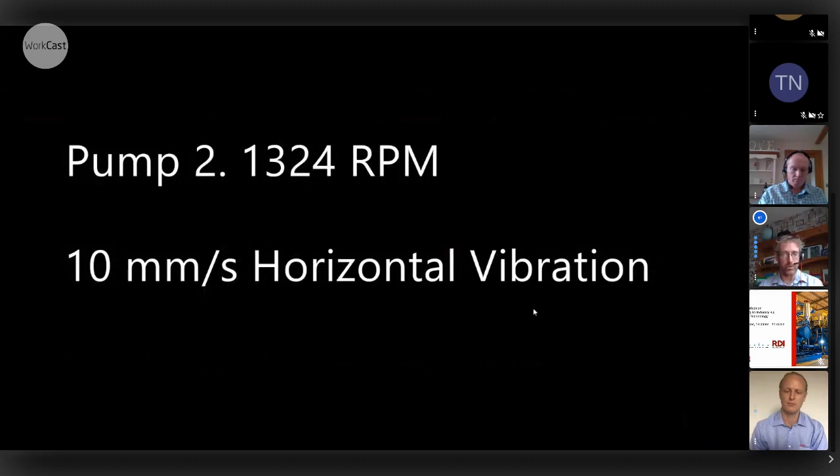So this was an example of how you're not just using this for rotating machinery, you're also using it for pipe work and structural supports. And it's an example of how easy it is to use. Once you give these videos to people, there's no debating where your issue is. You can see it, it doesn't lie. That's the beauty of it for me.

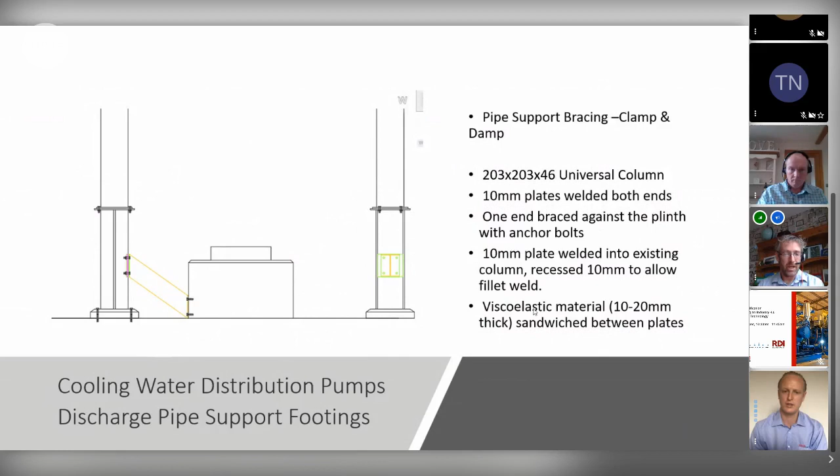So that pump, that issue, was actually two issues in one. The first issue was the structural support issue, and they went away and fixed that. Then about 5 weeks later, they came back and said, 'Look, that pump is vibrating something terrible, I'm not sure if that pipe support thing worked.' So the second video you showed there was actually...

We looked at it with the handheld data collector. There was a huge rise in the 1X, which to me normally means you've either got a balance issue or some kind of flexibility issue. But if you've got a balance issue in a pump and want to check the impeller, it's a huge deal to bring down the pump, drain it down and open up the pipework. So the Iris M camera was used again pretty quickly, within about 2 hours, just to look at all the pipework, the plinth, the base plate, to make sure there's nothing loose, no cracks, and nothing else contributing to that rise in vibration before we got the guys to open up the pump.

And so that again is worth its weight in gold, because to do that, you've got all your permits, you've got multiple people involved, and at the end of it, the plinth and everything was actually fine. So when they opened up the pump work, they actually found that the strainer had disintegrated and was lodged in the pump itself. So it was a good find for me.